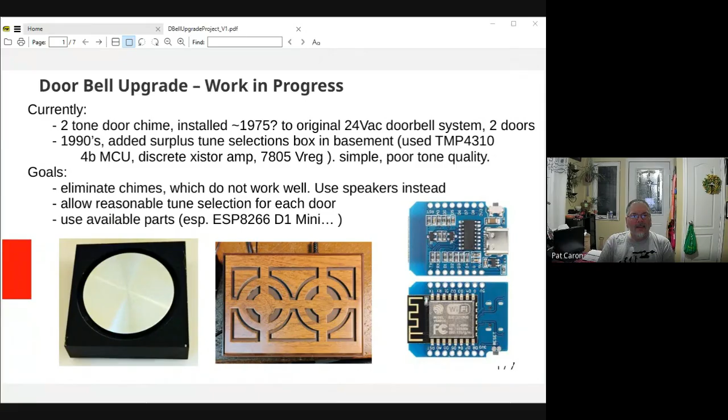You can hear that. No, we did not. Heard something. Let me turn it up. It's very quiet. Be very, very quiet. Okay. So I think I heard something there. I heard a little squeak, but not very loud. Oh, I am very surprised. It's quite loud here. I wonder why my microphone is not keen on showing it.

Anyway, that's about 11 seconds worth of some Tchaikovsky, a Tchaikovsky symphony, which is my first experimental waveform that I've been working with to try and make this happen.

Back to the presentation. I had talked about the fact that I had very old doorbell systems, wanted to do something fancier, wanted to be able to actually play some selections of real music instead of the non-descriptive, hard to identify front and back doorbell chime things that this thing has done for many years poorly.

Also, you'll see the photos of an ESP8266. It's a WeMOS D1 mini clone. I assume you guys can hear me, right? Yeah, okay. So this is the WeMOS, this is the 8266, which is one of the objectives was to use this.

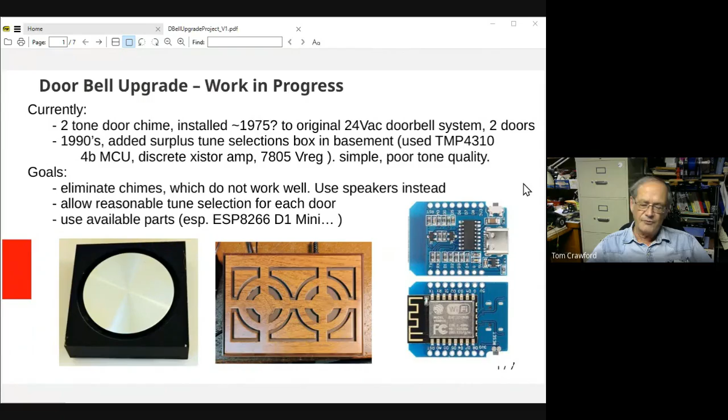So I had talked about looking at some choices for analog output. What I ended up doing and what I'm working with is an 8-bit R2R D2A converter connected to an 8-bit shift register, which is fed from the serial peripheral interface on the microcomputer module running at 10 megahertz. That works very, very well. That feeds into a simple integrated circuit audio amplifier and produces the music which you did not hear, but which I can hear. So for the moment, that should be sufficient for moving forward.

And I've gotten this functioning after a long, long learning curve, shall we say. Now let's see what's relevant. I originally looked at a number of different music formats to try and figure out what I was going to use. I eventually ended up with...

Oh, thank you, babies. Do you want those for lunch tomorrow? That'd be wonderful. Yeah, let's all have lunch. Yes.

Yes, I eventually ended up using WAV files. After some experimentation, I'm using 8-bit unipolar WAV files running at 8 kilohertz, not 16-bit or 44 kilohertz which is more typical, and they're mono. I use an audio workbench tool called Audacity to do the conversions from typical MP3 files down to the files that I want.

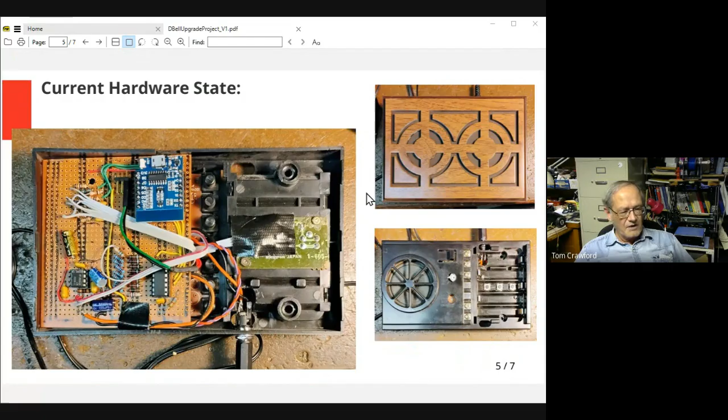In terms of the code execution, this thing - I mean, a doorbell's simple, right? You push a button and it plays some music, and depending which button you push, it plays different music. What could be simpler? Well, when you read up on the LittleFS file system, you start to worry about whether there's some variable latency in the time required to fetch data from the file system.

In order to have it available within the execution loop, in order to output it at a very steady, fast rate to the D2A converter. If you don't maintain a reasonably fast, fairly steady rate, you don't get reasonable representation of the sound. I was originally working with 16 kilohertz files, which left me about something on the order of about 60 microseconds to get everything done.

The LittleFS system can easily load a byte of data into the code in 10 or 15 microseconds. That's basically just software overhead in the file system, but it's variable. There's a number of things that cause it to change.

So I spent a lot of time putting together and testing various buffers. I built double buffering with various capacities. I built a circular buffer. I tried brute force - I loaded as much of the music file as I could into one enormous array and then played it all from the array.

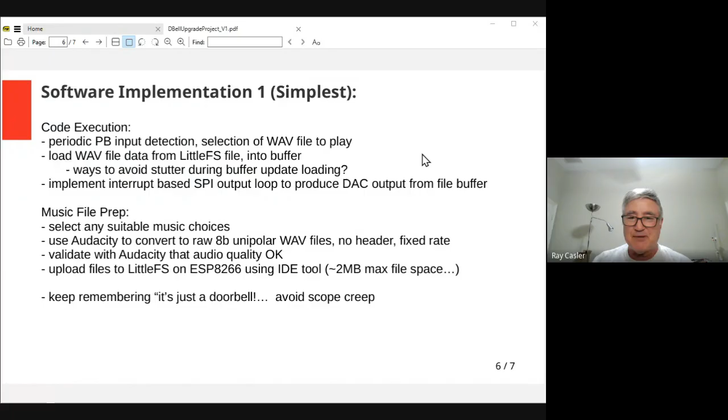The ESP8266, although it's Wi-Fi capable, it only has one CPU. So the minute you enable the Wi-Fi logic, of course, all the rest of it is going to break. So I haven't even considered the possibility of implementing some form of Wi-Fi access to this thing.

Interesting. I wonder if your sound problem is because your microphone has maybe noise canceling and it's not in the audio range, in the vocal range.

Oh, yeah, that's a possibility, I guess. Although an 8 kilohertz output rate suggests that the upper end of the frequency I'm able to produce is probably no more than 4 or 5 kilohertz, if that. So I'd be surprised the microphone would have a problem with that. There must be something fancier with the Logitech mic that's built into the Logitech camera I'm using, the USB camera.

I don't know what it is. I can try it again. Those have, it'll work again. Some of those have pretty directional kinds of things, like the microphone array on my laptop will only pick up me sitting in front of it. It won't pick up any sounds to the side. It does a great job of that.

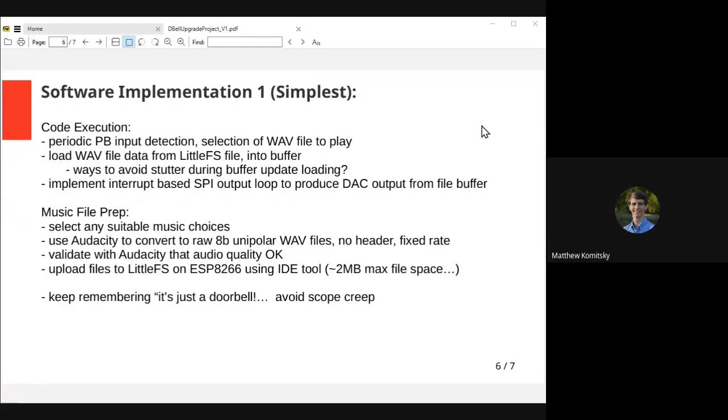You can also turn off the noise canceling in the microphone settings. Yeah, I'm not sure why noise canceling would be the problem. I mean, this source of noise is coming from the same place as my voice comes from. So I don't know what there is to cancel.

Yeah, that's just my thought, why we couldn't hear it, possibly. Yeah. Anyway, it sounds great on my end. It sounds better than I expected to get from a simple 8-bit D2A with some very simple low-pass filtering on the output.

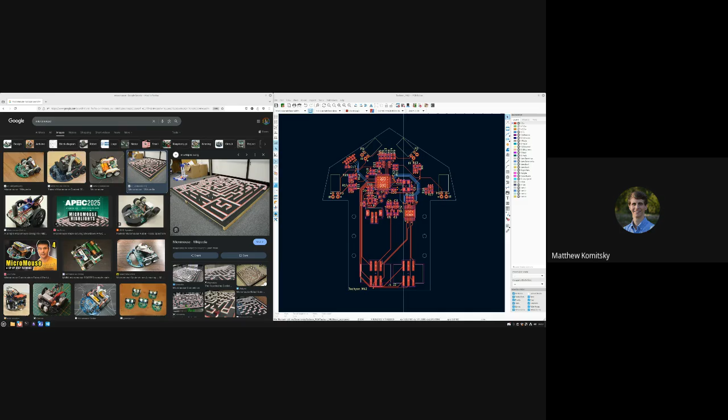As of Saturday, I just ordered the PCB that you see here on the right. I'm expecting my motors to arrive about the second week of November. So I'll have my PCB in a couple weeks, and the motors a couple weeks after that.

My software is in a pretty good state. I'm at the point where it's about time to start doing some hardware tests.

This version of the bot is not meant to be super competitive. The most competitive ones around have fans that suck it down to the ground for more traction. I don't have any of that right now, I'm just trying to get my foot in the door. So the intent here is to compete at the competition in March.

So I don't have too much to share. If people have some questions, be happy to take them. But yeah, I'm curious, Matthew.

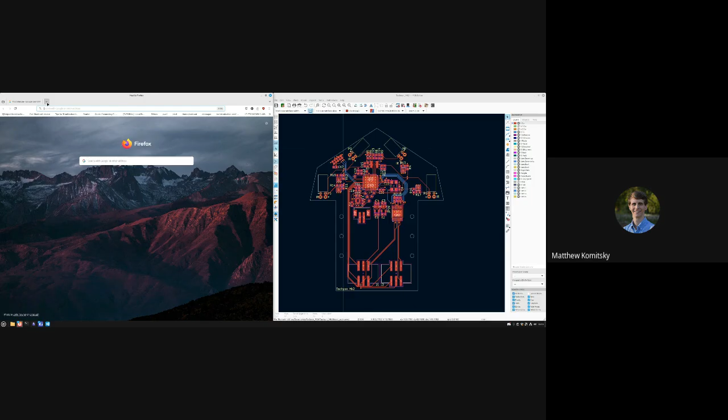What kind of motors are you using on it? I'm using two brushless motors. I can pull them up if you're interested in seeing them.

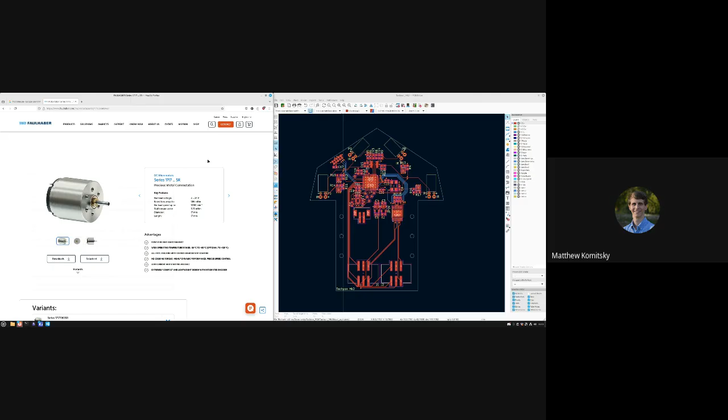They weren't cheap, but these have built-in encoders on the back of them, and they're very small - about 17 millimeters long and 17 millimeters wide. Very small motors. The PCB on the screen is only about 7 centimeters at its widest point, not too much larger than a credit card.

So, your wheels are direct drive on the motor? They're going to be geared. There are a couple examples online you can look at.

You can see on this example how he has the gear in the center, and then two wheels on each side. On mine, since I don't have the downforce fan, it's not going to be competitive anyway, so I decided to just use 2 wheels as opposed to 4. I'm not trying to go super fast yet.

After I compete in 2026, I'm going to build one that has a downforce fan, and we'll see how well that goes.

The circuit boards here, the PCBs you had made, are you getting them populated by the fab house? No, I'm doing it all myself. I have a couple of gadgets.

I don't have a way to show it right now, but there's actually a bit of a story here. I made a different circuit board like in January and it did not go well. I did not know how to solder SMD components and had tons of bridging. So I took a step back and did a ton of research on soldering these small parts, and realized I made a few critical mistakes.

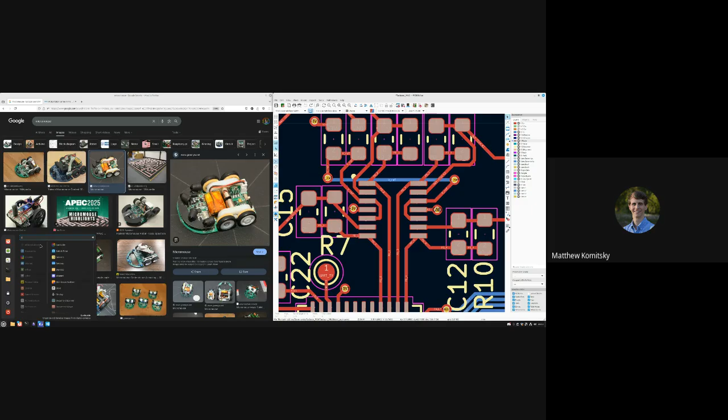Did you have some sort of silk screen to apply? Yeah, I've got an etch stencil - it's like a laser cut piece of stainless steel that has the paste pattern on it, and then you just squeegee the solder on top of that.

I'm trying to find a picture of this gadget that I made. I used a couple pieces of aluminum extrusion - I don't have it on my computer, but I'll find a picture for next time.

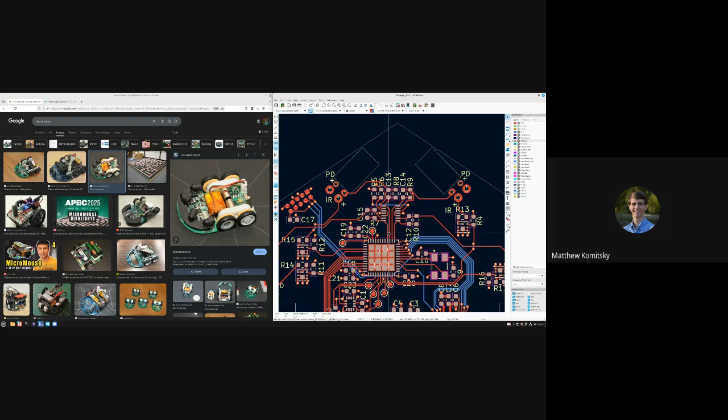It's a piece of... yes, 3 pieces of aluminum extrusion, and then I attached a very fine blunt tipped syringe needle to it. I have a vacuum pump connected to that, so I can move this thing around on my desk and lower the needle down until it's right on top of the pad, then turn off the vacuum pump, and it drops the part onto the paste. It works very, very well. It's like a manual pick and place machine.

So that's how I place these super small components without them smearing around anymore. So you can do X, Y, and rotation of the part then, or?

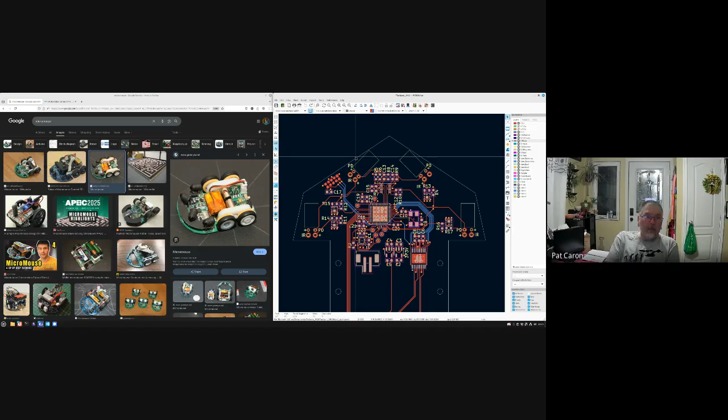Yeah, I think I have a picture, hold on, I'm surfing my phone right now. I think I sent it to someone. You can take pictures while you're assembling this board. That would be great to show and present to everybody. Yeah, I was thinking about it actually, kind of making a video of it. I think that would be fun. Oh, I think it would be fantastic. It'd be a good thing to practice my editing skills. I think that could be cool.

So did you modify a toaster oven to melt the solder and all that, or? No, I just have a hot plate.

Oh okay. Okay, I found the picture, I'm gonna pull it up on the screen now. Okay.

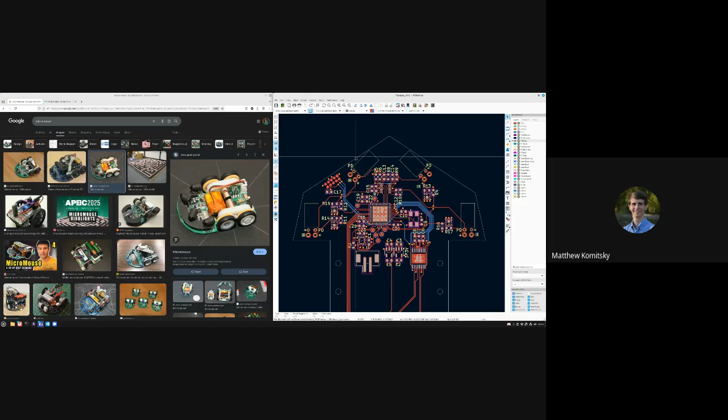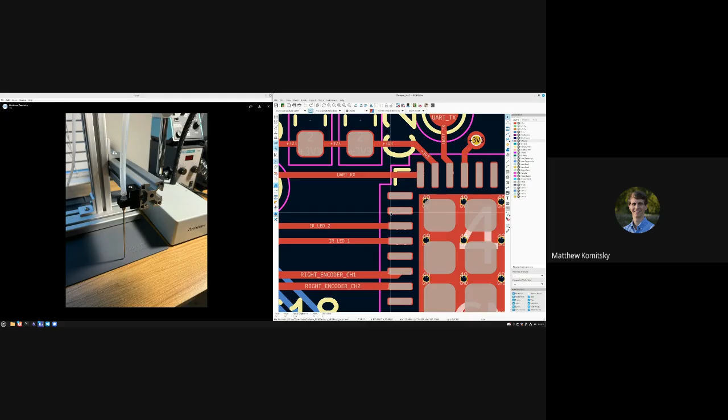How do you register the mask on the printed circuit board? Is there like a stud or something that it slips over and lines everything up, or? I tape everything down to a granite countertop, so it's super flat, super solid, and then I just try to line up the holes the best I can. It's not perfect, but it works well enough for one-offs. If I were doing a lot of them, yeah, you could have some studs or screw holes on there, but I didn't bother with that.

So on the left side of the screen here, this is the contraption I'm talking about. You can see the blunt tip syringe. I actually have two of these tips. This is the thicker one. I have one that's extremely fine, extremely flexible, you can barely even see it, it's like hair, but you can use that for the small capacitors and resistors. This whole rig moves around, and you can control exactly where it's going to be.

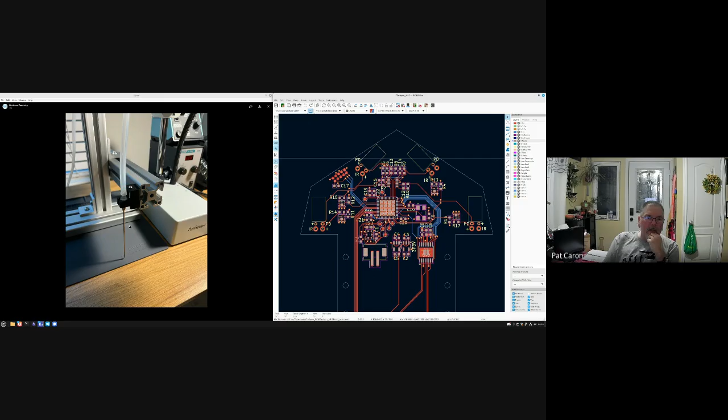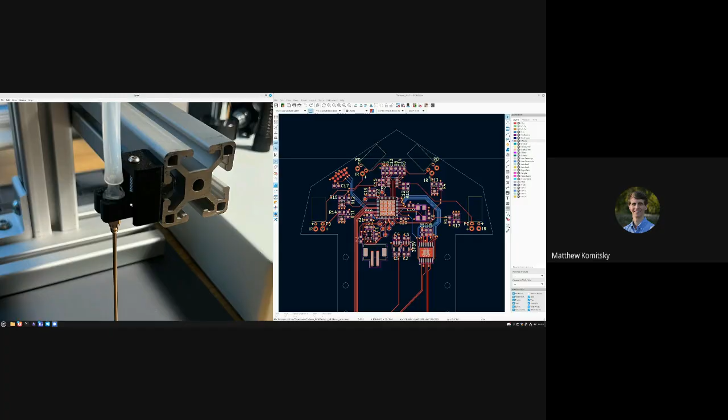So it moves around like an XY axis type thing, and XYZ. Okay, so it's just... so there was an attempt to add a Z. You can kind of see on this picture, I had this idea to use a screw to go up and down, and I 3D printed this structure here, but there was way too much slop, so I did something else.

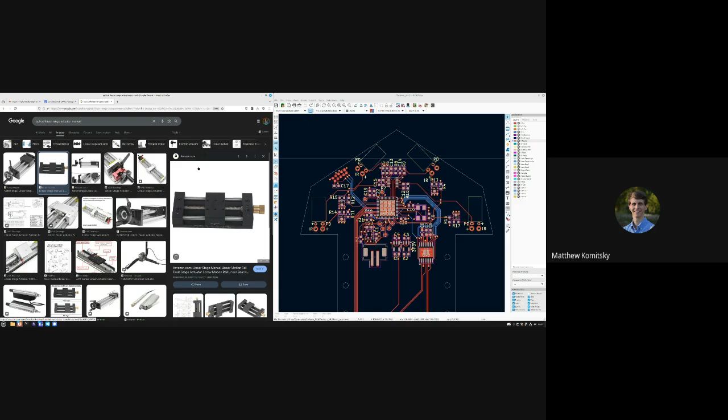I haven't added this yet. Let's see, I bought this thing called, I think it was an optical linear stage — it wasn't, I'm trying to find the link to it. So I'm going to replace that with a very small handheld version of this. I've got it at my desk, it's about 1 inch by 1 inch, and it has about 1 centimeter of travel. This is used for very small laser experiments, so they need very fine control over the linear position. I'm going to replace my very sloppy attempt with this very precise product, and that should solve the Z.

As for the X and Y, I'm just going to leave it as it is right now. It actually slides around very smoothly on the ESD mat, it has the perfect amount of resistance, and I don't have a problem with the X and Y. It's just the Z is a bit challenging without having the manual height adjust.

You have to load the parts manually onto there? Yep. I'm about to share a video actually, if I can get it sent to my computer here. Okay, let me share this one. I'll create a better video of this because I think it's pretty cool — I think it's even cooler than the robot sometimes.

Okay, so this is a video of a test board I did. So it's holding the resistor, and then I turn off the vacuum pump, and it just drops on top of the board. Here, I'll play it again.

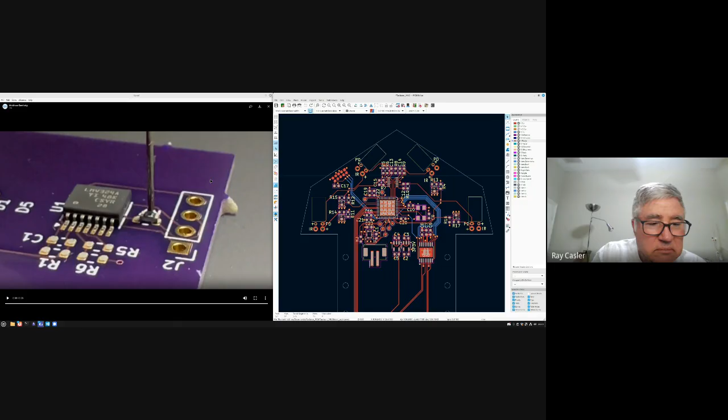Interesting. So you've got to align each component at some pickup location, pick it up, bring it over, and drop it off. Whatever orientation it had as far as rotation, you don't have any control over that. Right, I have to manually pick everything up and drop it onto the pad. I can rotate the part with some tweezers and get it roughly in the right spot. But yeah, the process is manual. It's just not worth buying a pick and place machine or having them do it because it's such low volume—I'm just doing 1 or 2 of them.

It would cost quite a bit to have them do it. Matthew, as I understand it, there are no motors or automated mechanisms on your pick and place rig, is that correct? That's correct. The only motor is the vacuum pump that's holding the part on the syringe tip. So you move it completely by hand in all dimensions? Correct. That's a nice idea, because trying to position those things freehand must be a really difficult proposition.

Yeah, I thought I could. I've got a microscope, but these components have a pitch of like 0.5 millimeter. If you smear it, there's a very high chance you're going to have solder bridging, and then good luck fixing that, especially on a QFN package where you can't even see the leads.

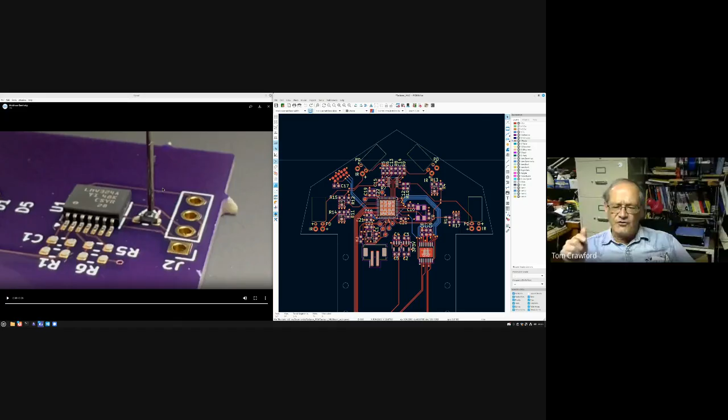Matthew, I take it you send your boards out to get them made, is that correct? That's correct, I had these made at OSH Park. Because if you didn't, I wanted to know how you did the gold plating. No, I'm not so hardcore that I do the PCBs myself, but I know some people do. I haven't done a ton of this—I've done a little bit, and I had problems with bridging and stuff too.

And how much flux do you use? Well, on this I'm using a hot plate and solder paste, so I don't really use any. Okay, well here's what I found—I'm using a hot air gun, and I literally just smothered it. You just got a little spatula and made sure my stuff was fresh, my solder paste was fresh, and literally slathered it across those pins, like that chip you're seeing there. Slathered it right across there and made sure I had plenty of flux on the thing. Hit it with the hot air for a little bit till it got molten, and it all sucked into the pads. I dropped my chip on top of it and hit it with that, and it just sucked it down. Physics helped me a lot. That's how I did it—your mileage may vary on that.

Yeah, that's one way to do it. I have a hot air gun, but I use it in certain cases. On this one I didn't, just because I wanted to experiment with the hot plate. Oh I get it, trying the thing to see which works better—that's exactly what you should be doing.

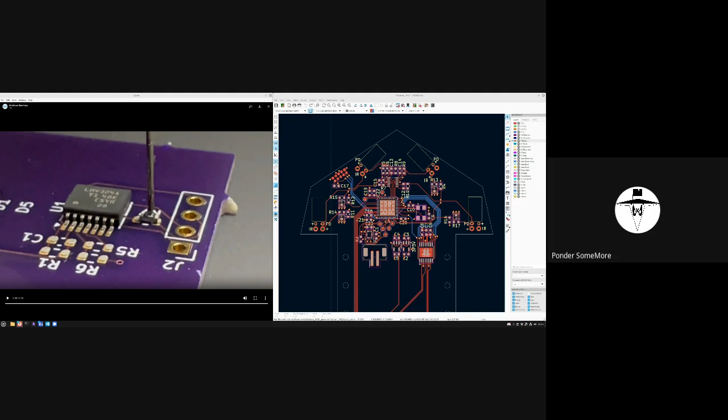And then this thing here is the hot plate, it's really small. We're not seeing any of that, Matthew. Oh, you're not? It's in his live video, but it would be easier to see if you turned off your presentation. Okay, sorry. All right, can you see it now? Somebody can pin him. Yeah, I'll pin him. That's much better. I'll have to work on my live streaming, this is the first time I've ever live streamed.

All right, so here's the contraption that you kind of saw in the picture. I use a couple of scrap pieces of extrusion, that's why this piece is so long here. As far as notes for your live streaming, try to keep your camera steady or we're all gonna get sick. I'm trying to, but it's not a very wide angle lens. To place the part I just move this thing around, and it's surprisingly easy to get very precise positioning on it.

That plus very young eyes. Yeah, that does help too.

Do you find something like surface tension will actually align misaligned parts a little bit? A little bit, yeah. In the video I showed, I had an integrated circuit that I think was slightly misaligned, and it moved a bit. But I find that it's just better to get it right the first time, it just seems to work better. So that's why I went through all this effort to make sure the part gets placed properly.

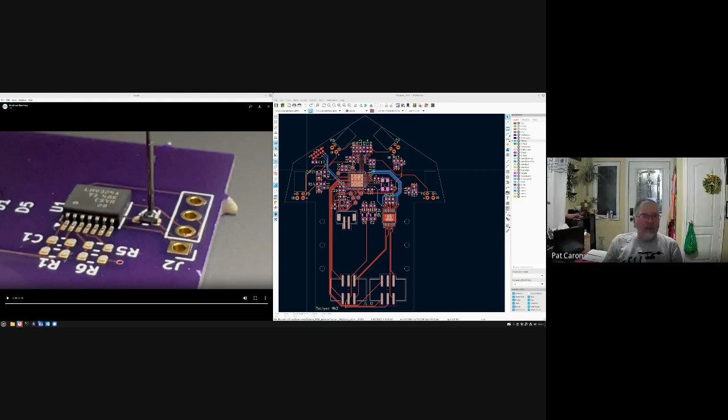That's really cool. I'm looking forward to seeing your progress on this. Yeah, me too. Hopefully by the end of November I'll have something running around.

My dad's helping me build the test maze. He's got a table saw and a bunch of woodworking equipment, so we're going to get that built probably around Thanksgiving, and I'll be able to start solving real mazes. It's a quarter size maze, so I won't have the full length, but I can't fit a full size maze in here, so I'll have to settle for the quarter size one.

Keep us up to date on your endeavors. Take lots of pictures as you're building this thing and soldering it up. Yeah, I'm sure you'll enjoy it. I'm gonna make a little video or something, because people ask about it and I have to explain it every time, so I'd rather have something to just point them to, so they can just go watch that and it explains the whole process. Thank you, that's been incredible. Of course.

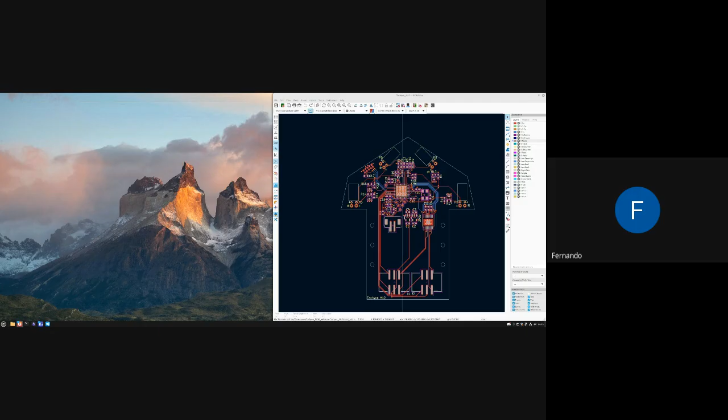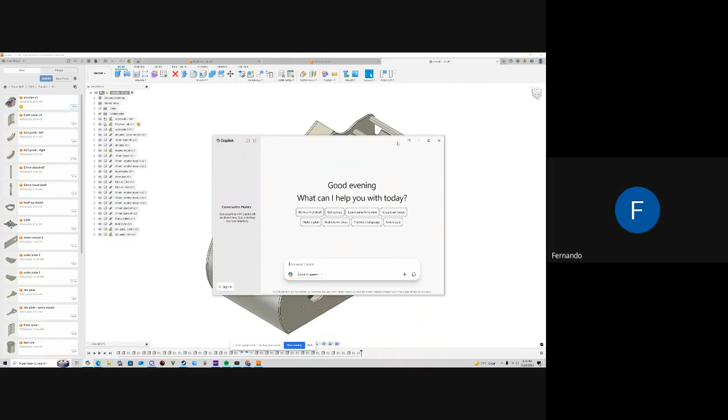So just a quick overview, this is going to be for the Iron Reign FTC robotics thing. The goal this season is basically pick up balls and shoot them out into the goals. I'll share videos of what we've done in a little bit, but the current thing we're doing right now is this flywheel. This is actually what it looks like now. It used to look like this.

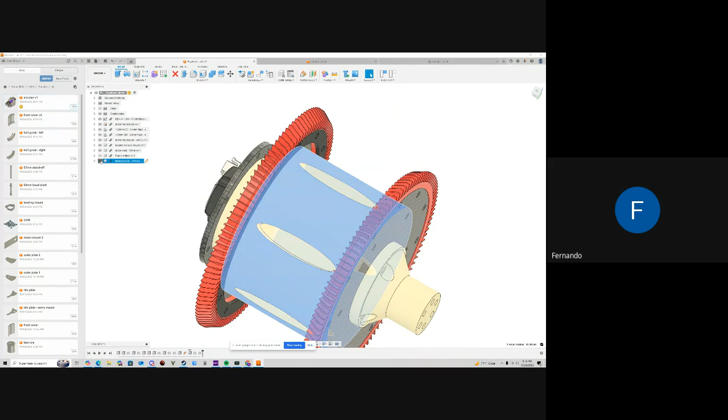These red parts are printed out of TPU and they have some flaps. This is just a cage meant to keep it together. This houses a motor, and you can see it's direct drive onto this plate here. Then the shell is what connects everything together. We made it out of carbon fiber because we wanted it lightweight so it could spin up fast, and not take too much time to rev back up after launching a ball.

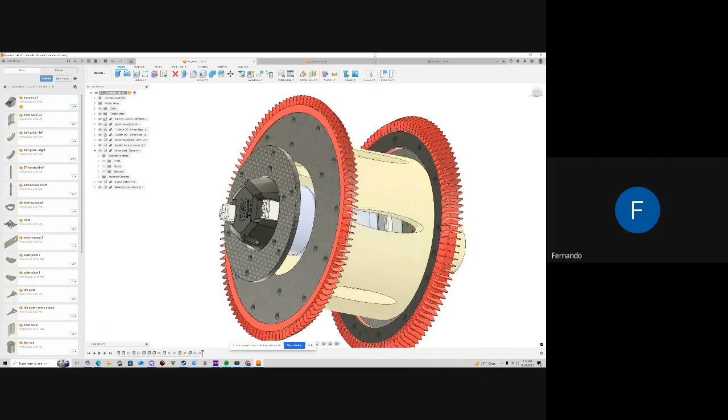Although the carbon fiber might be overkill this early in the season, but we'll see. This addition here, this change to the cage, used to just be standoffs made out of either plastic or aluminum. We're thinking of changing to this due to it being really wobbly, which I'll show again in one of the videos in a bit. This whole geometry might change, but it's there to allow for cooling of the motor, because in this motor shell it's completely enclosed and it's going to get really hot after spinning for seconds on end, especially when launching the balls.

And then we moved over to this after a test platform that we had, which I'll show now. So we had this — it's just made out of MDF that we cut on our CNC. The ball enters, goes out.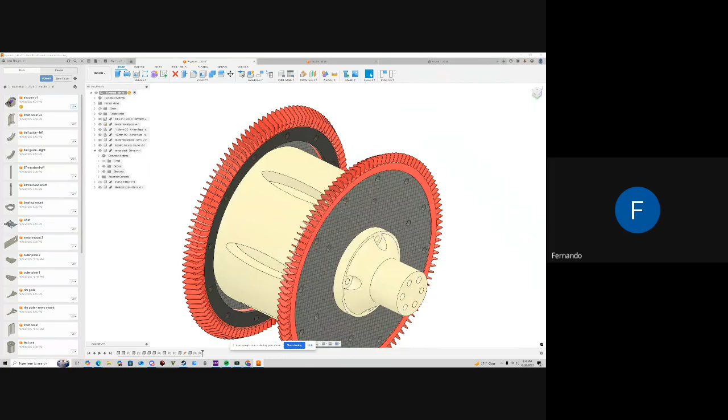So this is the big issue here, where we have all of this wobble on this specific side of the flywheel, which is what I'm attempting to fix with this extra cage here. However, I'm not sure that's actually going to do much for it. I'm not entirely sure, but it'll probably help a lot.

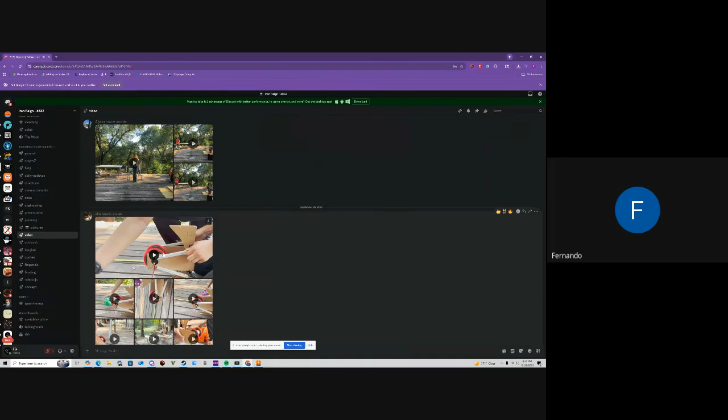And then this is how far it could shoot. I believe this was close to about 100 feet — sorry, not feet, 100 inches. At about 90 to 100 inches, and a little bit over 30 inches in height. I can't remember the exact numbers for that.

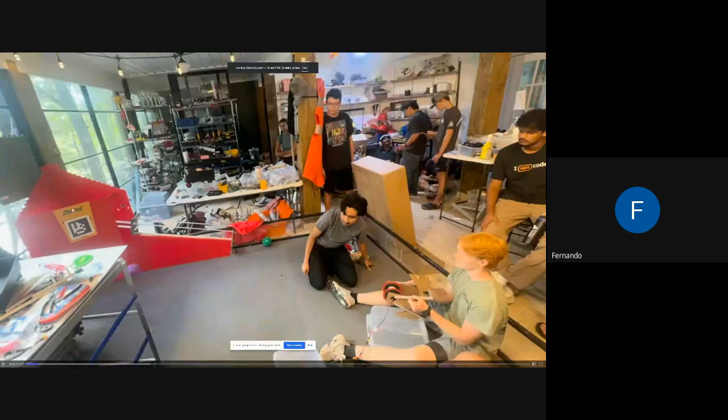Yeah, so it shot pretty far, and then here's this — this is where we're supposed to make it in. We either shoot from over here or from here in the middle. Still need to improve on our aim.

So yeah, this version was pretty successful. Just this janky test platform that we made out of MDF and some rev rails or aluminum extrusions. And now we've tried switching over to a design like this.

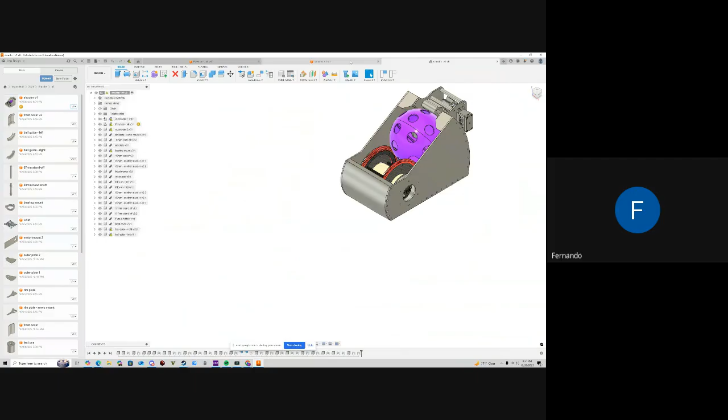However, that hasn't worked out very well. And then this is pretty much the same thing, with just some minor changes to the design. But what's going on is this is just not launching far enough.

I get max 10 inches, maybe in length, 10, 20. So it's really not going that far. There's no power, and there's visibly a lot of the power from the flywheels going into ball spin instead of forward velocity.

And then, like I shared a little bit ago, there's still this problem. It's really shaky. Yeah, just been having problems with that since its first conception, and now with this solo shooter without the whole ramp down here, it just does not have enough power to actually launch the ball.

I'm not sure if there isn't enough traction between the ball and this, as well as these guides here, or if there's just too much and it's not allowing the ball to spin, because it's also a bare motor, so it doesn't have as much power as other motors might have. But we kind of need the bare motor for the speed. So I'm not entirely sure what to do, and I kind of came here to ask for help and to show what we've been working on.

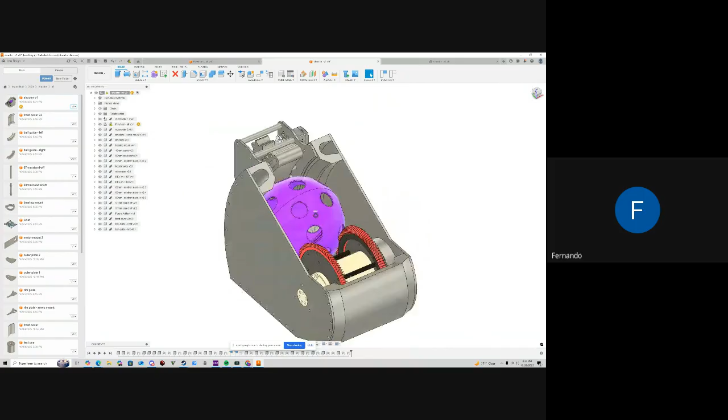Is there a way to mount a bearing support on the free end to help support it from the wobble? There is actually, hold on. Oh, on this end, let me see which end it actually is.

Hold on, I'm not used to using Fusion on the desktop. So this wall has a bearing in here, and then this one, I've tried finding a bearing that would fit it, but it would have to go like around there, and I just couldn't find a bearing big enough. Okay, for this side.

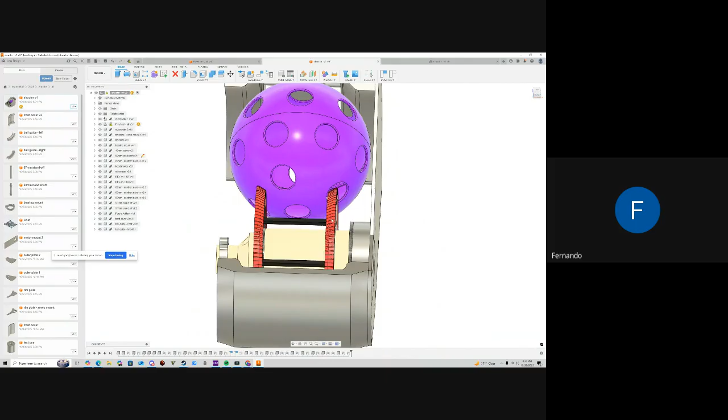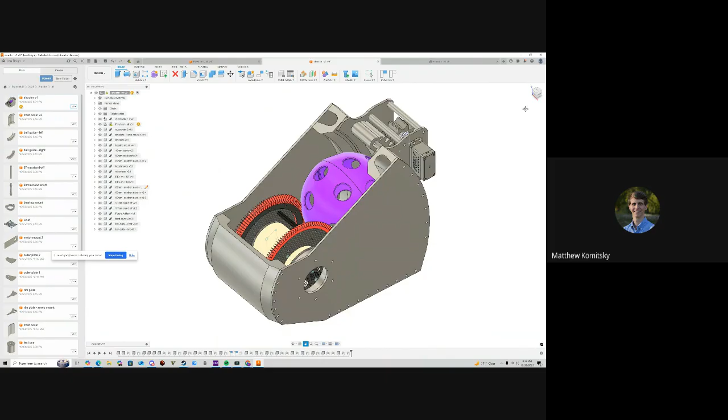You mentioned that most of the energy was going into making the wheels spin, or the ball spin. What if you used 2 flywheels instead of 1, and it gripped the ball from both sides, so it shot it out straight without putting torque on one side of the ball? Okay, so like adding a sort of counter roller around the same speed of this flywheel, somewhere here? Yeah, they have these things they use for throwing baseballs, and they often have 2 wheels, I think.

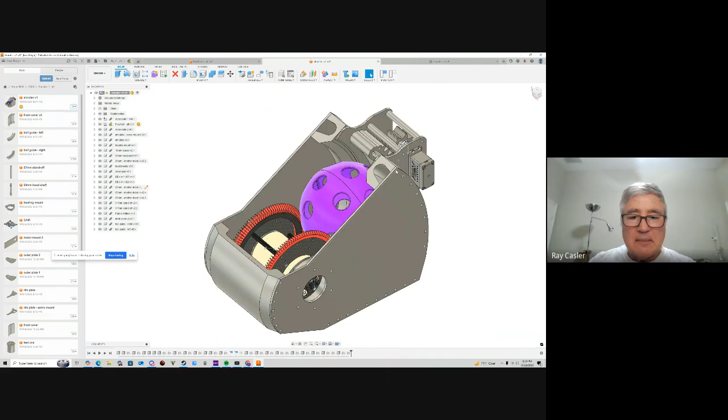Could you add a TPU strip on? I don't know what that is. I can't show you on my screen. On either side, where it looks like the ball makes contact with the back of the mechanism, not the flywheel or the other TPU strips. So, in other words, as the front two grab it, it actually pushes it against the TPU strip in the back, and that should prevent it from just spinning the ball and not throwing the ball out.

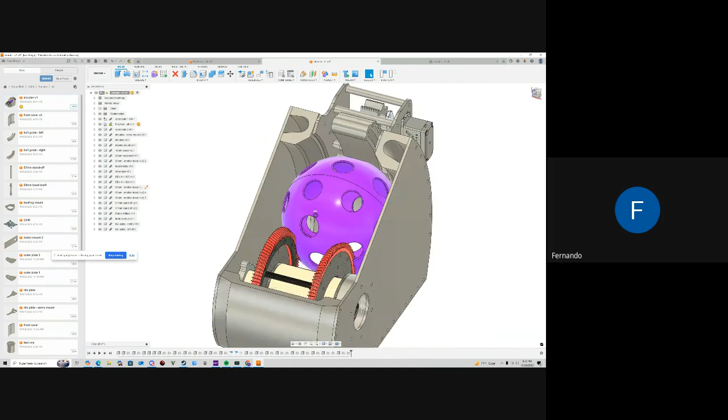Okay, I definitely could try that. Yeah, sounds good. Yeah, like on that surface that you just highlighted, right there. No, right there. Okay, either there or on the side. That may work, yeah, it definitely sounds like a good idea. But I imagine Mr. Kareem, all-knowing, all-seeing, can tell me whether that's a good suggestion or not.

No, that is a good suggestion. The dual shooter designs, or the dual flywheels, those are sort of like an entirely different approach to the problem, and I have two other teams pursuing that approach. The issue there is that because you have two counter-rotating flywheels, there's only one instantaneous moment at which they both compress on the ball at the same time. So there's an instantaneous huge amount of acceleration going on, whereas this approach gives you a smoother, gradual acceleration.

Although that's shortened in this design versus the first ones you saw, where you had a full half of a circle to accelerate through. So they have to be compressed pretty well against the ball in that instantaneous moment where they both hit it, and your side-to-side accuracy is much more difficult to control because of that really short period of time where they're in contact.

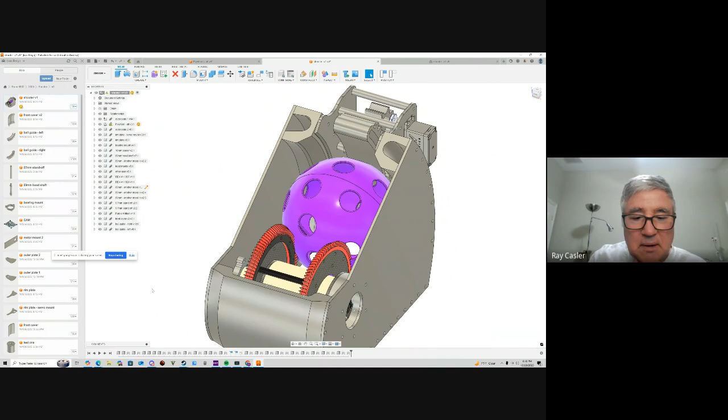We could make the chassis around the original design with the whole ramp. However, the way we're trying to hold it is we can hold 3 balls at a time, and we'd like to hold the balls on the ground vertically. Let me see if I can find a sketch we made. Basically, that would require this to be in the center, and that just can't happen with the big ramp because we're limited to an 18 by 18 by 18 inch cube, and we can't extend at all inside of that cube. So we wanted to save as much space as possible, holding balls at the ground, and then they have to go directly up.

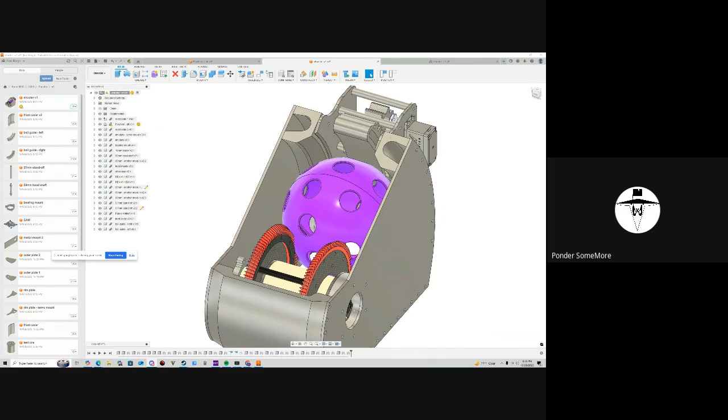There's additional space constraints this year because it's a big 5-inch wiffle ball, and they're still constrained to an 18-inch cube starting size. This year they can't even expand out of that except in the very last 20 seconds of the match. So the entire time they're shooting, they have to have a path that intakes the balls, holds up to 3 of them in a magazine of some sort, and then controllably delivers them to the shooter when they're in the right position for making the shot. So it makes it very difficult to do what they did with their initial prototype as a space constraint.

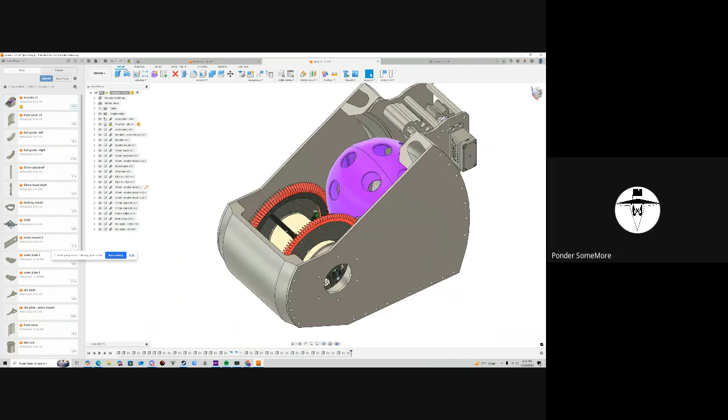What is the servo on the back of the launch unit for? This was kind of just my idea for being able to control the angle that the ball actually launches at.

I'm not sure if we'll end up going with this, as there are some issues with the design of the rack and pinion, and I have to work more things out on how to actually constrain this in the center. Mr. V had offered the approach of just using a flap that we control. So we should definitely experiment between both ones and see which one works.

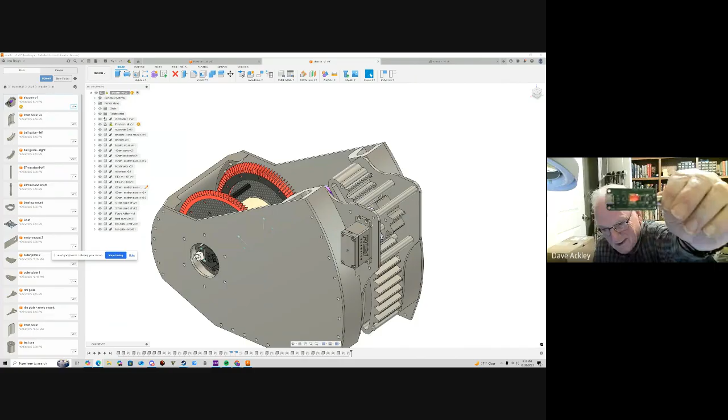What was Dave holding up? I was holding up an example where I did it manually with a soldering iron. I can show that a little bit larger when it's my turn. Okay, I'll put you in after Fernando, Dave.

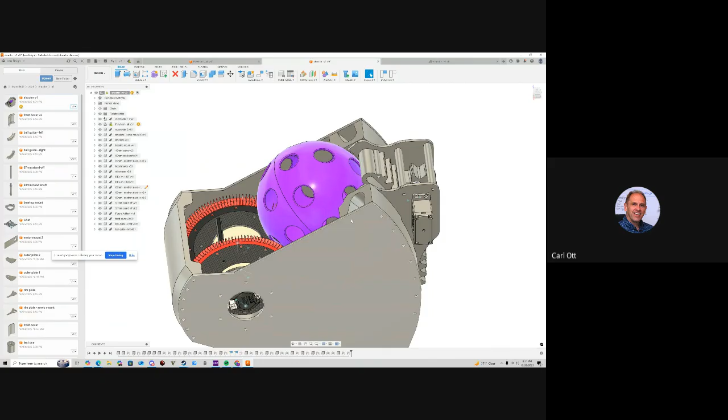Hey Fernando, it looks like the red wheel pushes the purple ball against the two supports in the back, I would guess. Is it that those two supports in the back have enough friction that they hold the surface of the ball so that the momentum transfers to rotation?

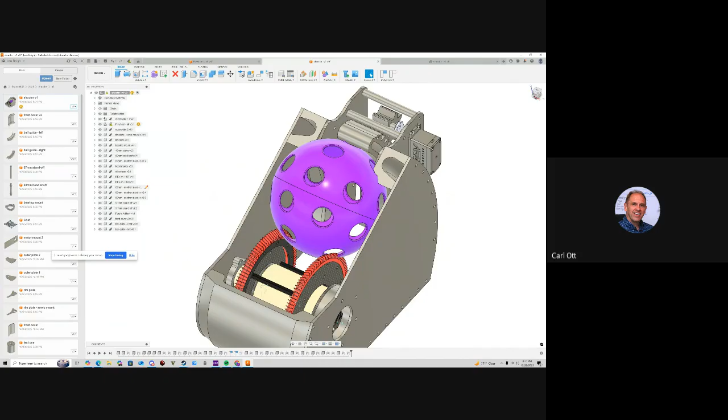So I wonder, what about if you're able to reduce the friction on those curved struts in the back? Like, I wonder if a lower friction material, if it was just solid, or if there might even be a way to line those with captivated ball bearings or something.

This is interesting, Carl, because you gave the exact opposite of what Ray was suggesting. So which intuition do we think is right? Do we need more friction or less? More.

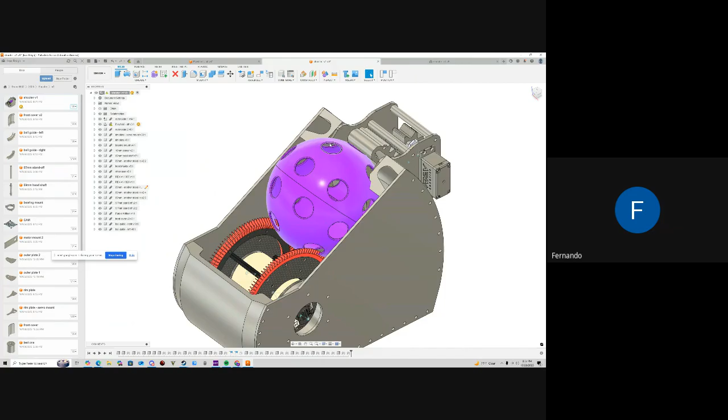So currently with these, I've already experimented with 3 different depths to change the compression that the ball has in the system. You would need some kind of compression to make sure it launches far enough, but maybe some is too much, some is too little.

Currently these are being made - the first ones I made were out of nylon, and now I'm making them out of silk PLA. They should have similar-ish friction, and it's along the layer line, so the layer lines follow the curve, so it shouldn't have too much friction. So I'm wondering if maybe the compression I'm at is right, but it just needs more friction. I think I'd test that first, since I've been experimenting with the less friction route already. I might have missed something.

Yeah, could you use like a foam wheel?

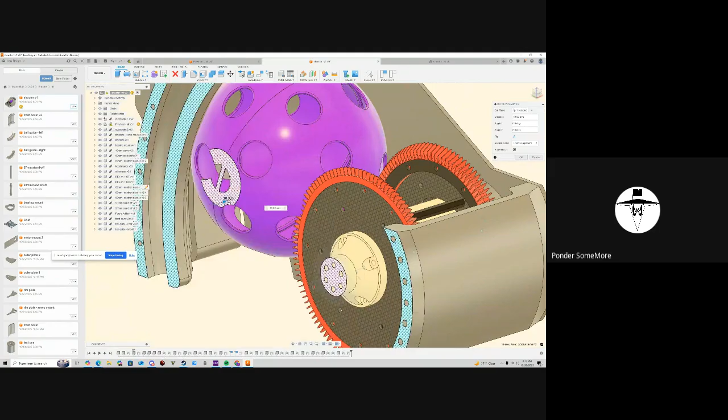So can you explain the fins and the construction of the red TPU? I'll explain the fins - the drive wheels, yeah. I want to zoom in on that too. Oh, actually - do you have the actual unit with you? I can go run and get it. That's all right, okay.

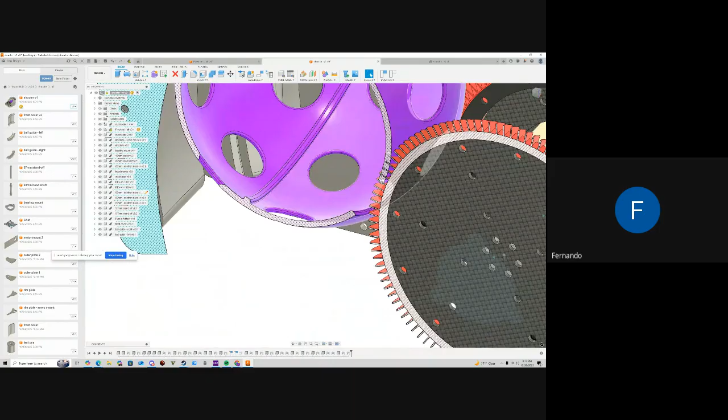So the fins - originally we had much smaller ones. They kind of just acted like little teeth that barely had any friction on the ball. But now these flaps will be compressed whenever going up against the ball, and some of them might even go into the wiffles of the wiffle ball, increasing the traction and friction it has with the ball, helping propel it forward. Another reason why we extended the length - same reason why they're made out of 85A TPU, more flexibility than 95A.

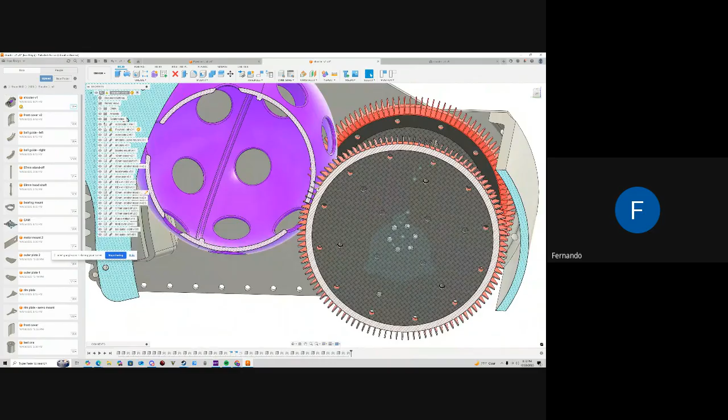Not sure if I missed something. Do those hold up that well, or do they break off after, say, 100 balls going through the mechanism? We haven't gone to 100 balls, but they've lasted up pretty well. Delamination is an issue or a concern with the TPU - I think it does happen slightly every time that we run it, but it hasn't exploded on us yet. So it's working out.

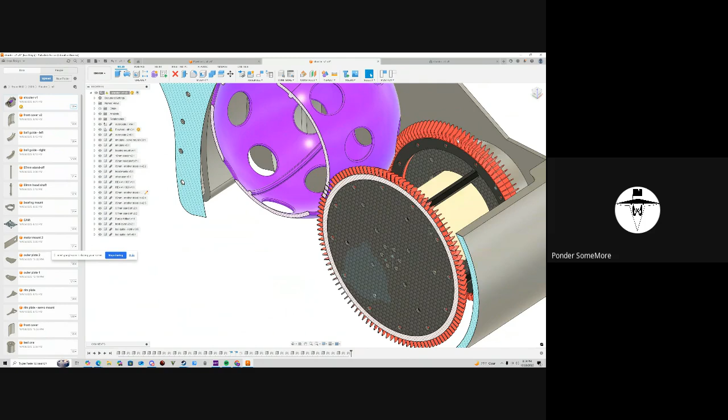The TPU is remarkably durable. It's crazy durable - we've been using it for years and years now, the same NinjaFlex stuff, and we've never had a part wear out. We've done this kind of thing in the past with different forms of shooters, we've built wheels out of them, and that's not the part that's going to fail anywhere near first - we've never actually seen them fail at all, as long as they were printed well.

I'm interested in the comments you made that with the earlier, simpler looking but larger launch unit, you were getting very substantial distances, much longer than you're getting here. Were the wheels essentially the same, the drive wheels? Yeah, they were the same flywheel, we just transplanted it over.

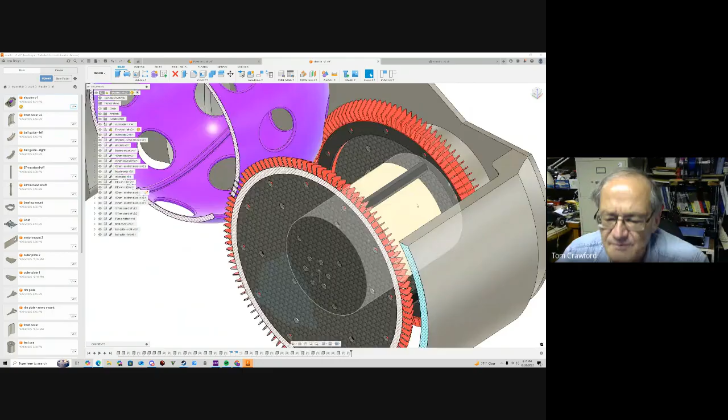Have you considered taking a video of the movement of the ball as it goes through the drive wheels to see whether there's any strange behavior happening in terms of slippage or rotation that's hard to see with your eye? Take a video, yeah, definitely should do that. We did it for the first one - study it frame by frame, slow motion. It sounded fairly obvious to me what the problem was.

The problem is this one has a much shorter acceleration path. So they're using the same wheel, but it's only in contact for a much shorter distance - it's in contact for about a third or a fourth of the distance of the other one.

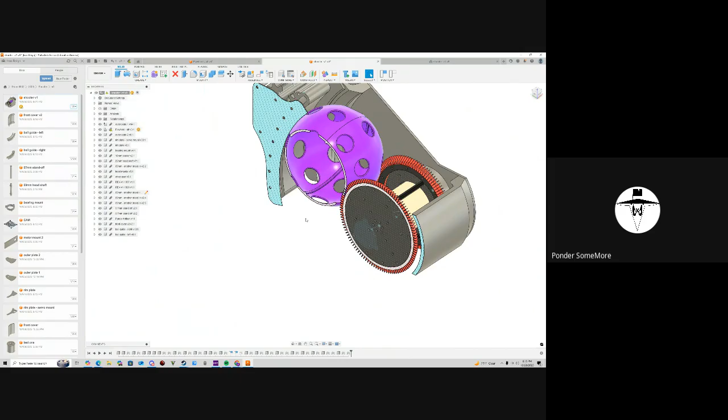So does that mean you're seeing a significant drop in speed of your drive wheel when the ball hits it? Probably, which was another thing. Adding weight would increase the momentum and reduce that drop, correct? If you add inertia, then it may not slow down as much, or add more power to the motor so it'll accelerate faster.

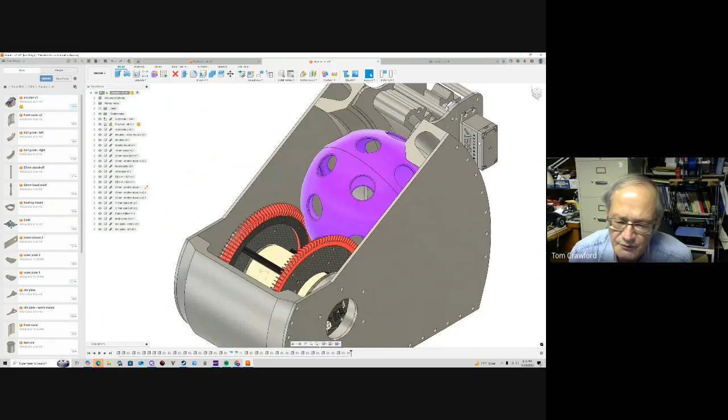We're already at our limit on motor power because they're driving it straight off of the battery maximum voltage, and they're not allowed to use more powerful motors. And this is already a 1-to-1, it's a direct drive, there's no transmission losses. So they would have to go to an external motor and gear it down for more torque, but then they're going to lose speed. They actually did some calculations early on about the size of the wheel.

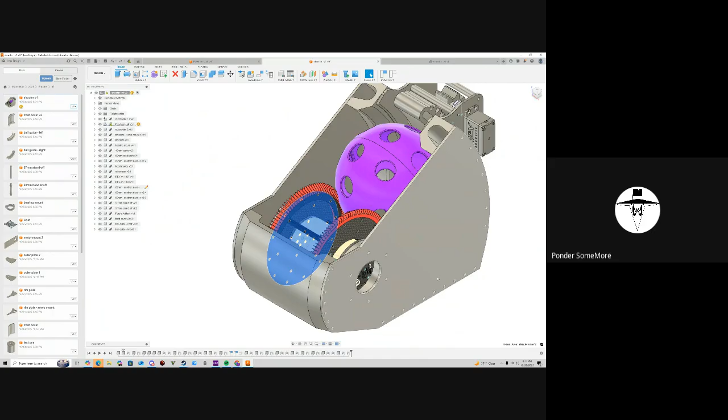It also has to get up to speed fast enough. At this point, how long does it take to get up to speed, Fernando? I'm not sure, it sounds like it's going the same speed, after a few seconds, but it's no scientific process by any means.

This would suggest that when the ball hits the drive wheel, it slows down a lot and never has enough time to get back up to the speed you need to launch the ball far enough. Have you considered a smaller diameter drive wheel?

Yes, however, we haven't gone there, but we probably should try it out. The other question I had: have you thought of using a drive on the back, on the opposite side of the ball, along where your servo gear setup is? If that was a rubber belt to help drive the ball through.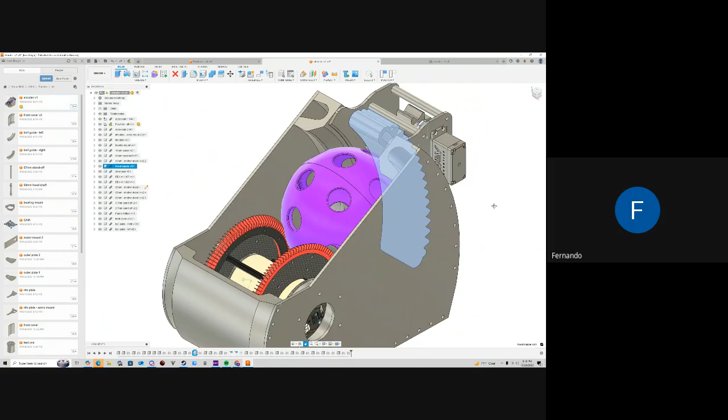As in, have the rubber belt move? How do you mean? Yeah, so it could rotate around.

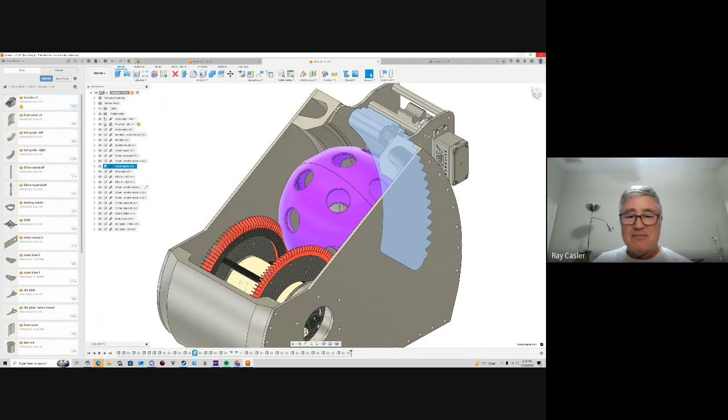I kind of wondered, this may sound crazy, like my wife says, get the ball spinning and then stick something on the back of it so it adheres to it and maybe takes that momentum and propels it out of the chute. Maybe it sounds too complicated.

I think that a TPU strip or something sticky on those two rails would work. I'm sitting here thinking, if you really want it to move fast and far, hit it with a baseball bat. Yeah, why are you using a wheel? Hit it with a bat.

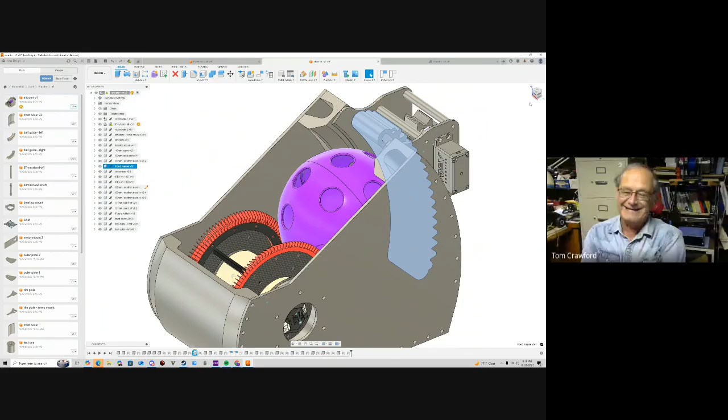If that curved thing in the back could, as the ball comes up towards the top, detect it and then use a solenoid or something to kick the ball out, or even better, get Ray's air compressor gun and blow it with a big blast of air. Small tank, maybe.

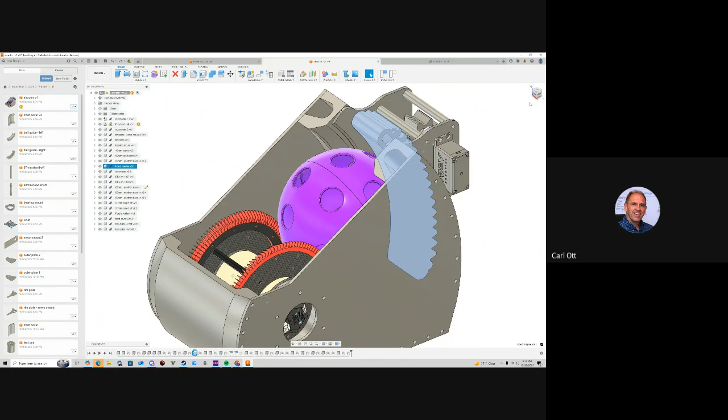Yeah, of course, that's going to be blowing a wiffle ball, and getting the blast of air right is tricky. Or set up dual TPU motors and do like a baseball launcher, grab both sides of the ball and launch it out.

Yeah, imagine a wiffle ball doesn't have a lot of inertia, though. If you could transfer that, get the ball spinning and then touch something sticky on the backside, so it jumps out of the little holder.

So at a couple seconds of acceleration time between balls, is that an issue? Definitely, yes, even on the old version. We have video of them, and having 2 balls at a time isn't too bad, but 3 definitely has issues. The timing has to be just right, so you have to have at least a second or two between balls.

And that's on the old version, so I can't imagine what it is on this one. Yeah, you're power limited and space limited, and you don't control the ball. Somebody else supplies the ball design. That's an interesting set of constraints.

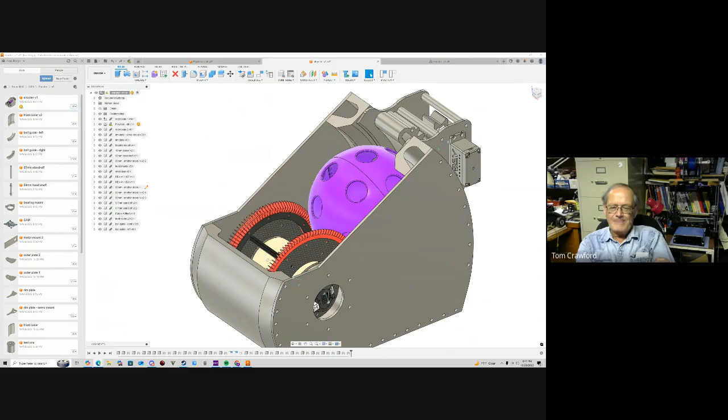And they're trying to shoot from the furthest distance possible. Of course, that's where the points are, right? Because you can drive right up to the goal and shoot from the base of it. And so there you have to be able to shoot almost straight up. Totally different trajectory.

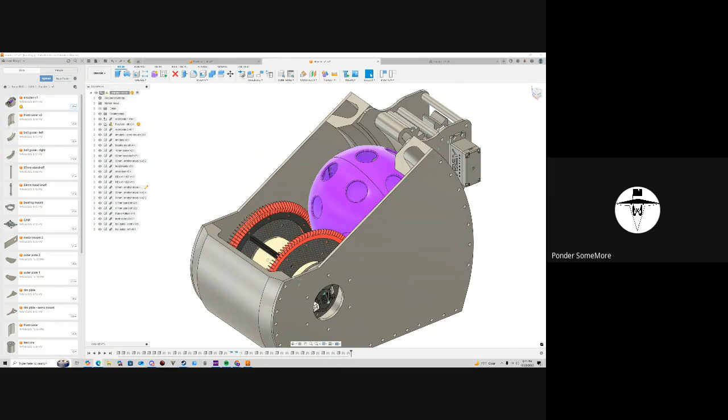But yeah, I think that's all. Thank you so much for all the recommendations and for the questions. I enjoyed talking about this stuff.

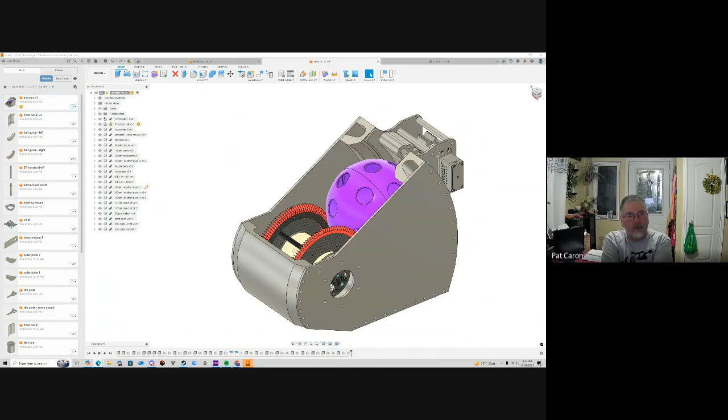Thank you, thank you for presenting, Fernando. It's always interesting to see what you guys are working on. And as we commented in the pre-meeting, it's amazing what you guys do in a short amount of time. Some of us are struggling for months on things, and you guys are banging out problems in a matter of days or weeks. And doing it in their spare time, on top of a full-time job.

Thank you, thank you, very, very interesting. Yeah, very interesting. We all had that kind of energy once.

Maybe a slingshot. Can you shoot a wiffle ball with a slingshot? You just got to be able to do it fast enough. It's like the scoring system is about how often you can repeat those.

There are going to be teams that are doing 60 of those throughout a 2.5 minute match or something like that. Oh, so that requires short reload time and just totally quick turnaround. So that's on top of finding the balls. Yeah, you got to go around, chase the balls down, load them up real fast, turn them towards the goal and shoot them.

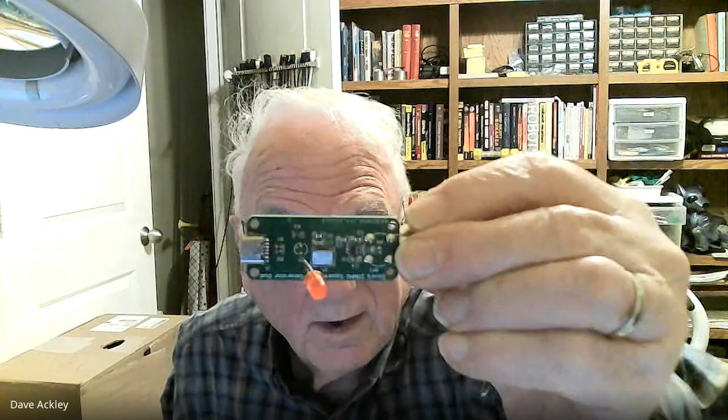Okay, I'm going to pin you, David. Oh yeah, let's try that. I got you pinned, okay. I don't know if you can see that too well. Clearly, right about there, yeah. Okay, a little more forward.

All right, those are all hand soldered parts. And with ancient eyes and hands. With those resistors right there, with a soldering iron or with hot air? Soldering iron. Yeah, maybe those eyes and hands aren't as old as you think.

Those resistors right there are 603s. This part right there is a SOT 23-6, which I think is about 50 mil spacing on the pins. But the resistors and capacitors are larger, they're 805s. I only did 603s there because the spacing was such that between the pins here on a USB-C connector constrained that. But those are hand soldered.

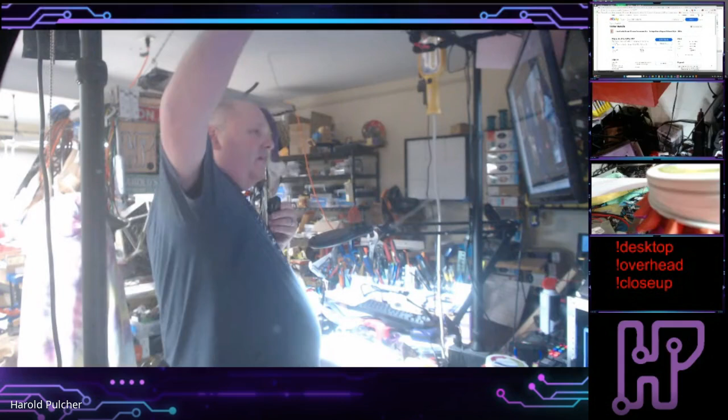Oh yeah, there he is. Harold, can you update us on the solder guy you had mentioned for the video? Yeah, his name on YouTube is literally Mr. Solderfix, that's MrSolderFix. He's got kind of a British Australian type accent. Kareem just posted a link to his channel.

He does amazing things, going through and doing all this stuff so you can actually see. He'll do through holes, fix traces, do SMD things, all this stuff. One thing that amazes me is when you have a through hole and need to clear it out. You usually get the solder sucker or wick on it, and you end up closing over the hole, and then you have to get the hole clear again. But watching him, his board elevated a little bit, as he's soldering the thing just drops out clean as a whistle. It's truly amazing, he's a miracle worker.

It just dropped out of the hole, he calls it 'drops out.' He solders on it repeatedly, and eventually, because of gravity, it grabs it enough and just drops right out, clean. You'd think the holes would look used, but they don't. You'd think they'd never been soldered on when he got done with them. He just seems magic, he's the solder whisperer.

Incidentally, the solder I'm using, let's see here. Is it tin-lead or antimony? It's 15 mil solder. Is it flux core? Let's see what it says. Yep, flux core. And while I've got the floor a little bit, Kareem did a heck of a job presenting at Hackster the other day.

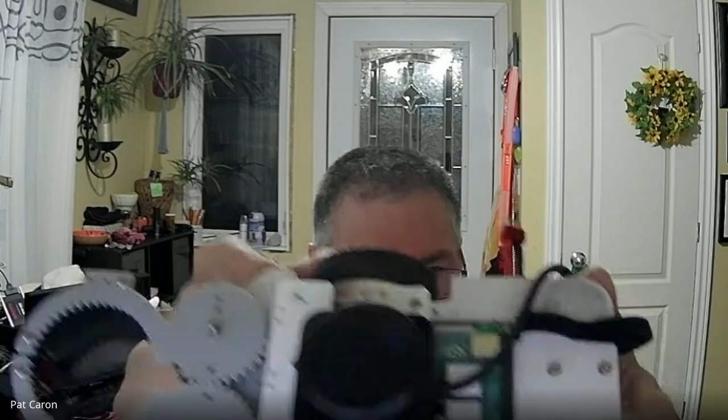I've been working on the MicroPython for that RP2040 board. Underneath Mr. LiDAR, I have a hard drive for lack of space of putting it anywhere. It slips just on top, covering part of the Raspberry Pi, hopefully leaving enough of the heatsink showing. So, been making a little bit of progress on it, nothing spectacular, but it's coming along.

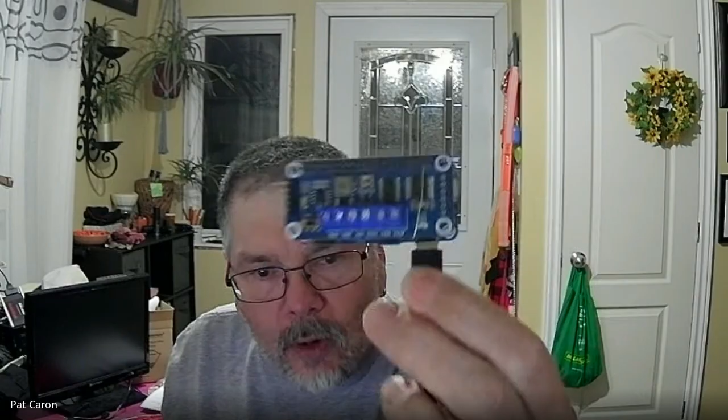I'm getting ready to test the motors with the motor driver hat that goes on. There it is, a motor driver hat that fits on top of the Waveshare RP2040 Raspberry Pi Pico board. On top of that is the board I've been soldering, for the encoders. Hard to see, but there's encoders and a servo coming off the board.

So just getting ready to put that in and start spinning some motors and checking the encoders that they're working. Then starting to develop and tune the PID loops for it and make sure we can drive forward.

Aside from that, I've been also working with Paul. Paul helped me out last week a little bit with some ROS 2 and getting Docker up and running, so I have that going. After the nice GitHub presentation we had the last couple meetings, I've got another project up on GitHub and synced. So now I'm just working on what part of my robot I should be pushing up to GitHub.

Does it need to be the whole ROS folder, or can I just do maybe a couple files in the source folder? I'm not sure which way to go with that yet. That's what I've been up to. And too much work.